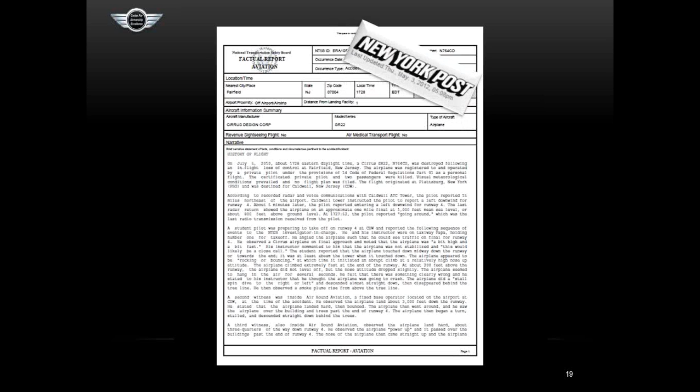Now, all of the information here in this presentation comes from the NTSB factual report on the accident and some background information out of the New York Post.

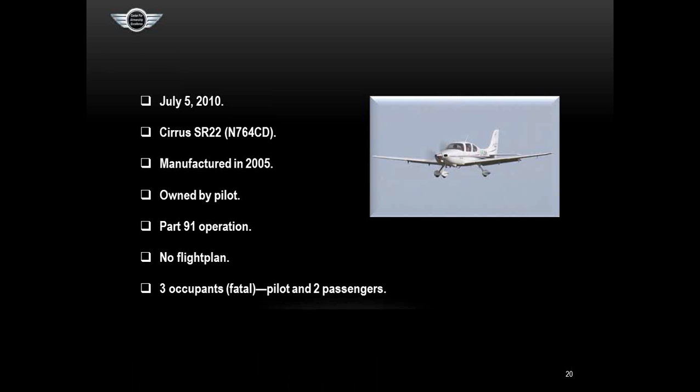The accident took place on July 5th, 2010, so a couple years ago now. It was a Cirrus SR-22, manufactured in 2005, so 5 years old at the time. Owned by the pilot, Part 91 operation, no flight plan filed. There were 3 occupants of the aircraft, and they were all killed—the pilot and 2 passengers. The 2 passengers were family members of the pilot; I believe it was a stepson and his wife, as I recall.

The crash took place at Essex County Airport in Fairfield, New Jersey, and here you can see that located on the northwestern edge of the New York-New Jersey megapolis.

The accident pilot was Dr. Margaret D. Smith. She was 70 at the time of the accident. She held a private pilot certificate with airplane single and multi-engine land, and she had an instrument rating. Total flight time was 885 hours. Total Cirrus SR-22 time was 287 hours, so quite a bit of time in type.

I'd like to point out here, because I won't remember it later, Kern points out in Redefining Airmanship that the Air Force did a study: if you have less than 400 hours in type, you are at much higher risk for error in the airplane than if you have more than 400 hours in type. So even though 287 hours in type is really a lot for us personal flyers to have in one type of airplane, it's not really up to the level where the study, and common knowledge, indicates you're fully comfortable in that airplane—really know it well, have all your procedures down. So it looks like a lot of time, but not really.

She held a third-class medical that was issued the year before with waivers and limitations—we don't know what they were. She had an instrument proficiency check on June 27th of the prior year. So on paper, she was pretty current and pretty experienced.

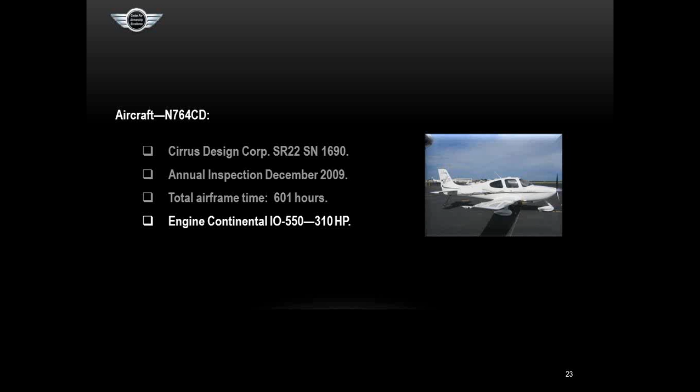The airplane, again, a Cirrus Design Corp SR-22, serial number 1690, so not real early in the run—a mature airframe. Annual inspection was completed the year before. Total airframe time was only 601 hours. And the Continental engine was an IO-550, 310 horsepower, so a lot of oomph to get that airplane going when you needed it.

The accident flight actually departed Plattsburgh, New York at 1600 on the afternoon of the accident. Here's Plattsburgh, upper Hudson Valley, and there's Essex County down here in the megapolis. You can see the route of flight was pretty much down the Hudson. Again, no information on whether they actually followed the Hudson or just did GPS direct, but that was the basic route of flight, the direct route.

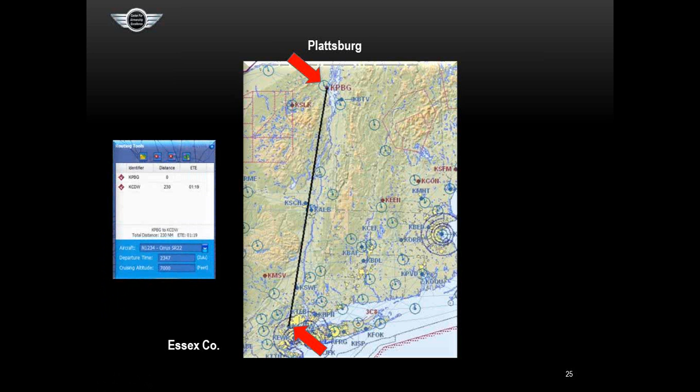AOPA Flight Planner, no wind, says that takes an hour and 19 minutes. As you can see, the flight departed Plattsburgh at 1600 and the crash took place down at Essex County at 1728. So it pretty much looks like they came pretty much straight down, direct, and then maneuvered for the landing.

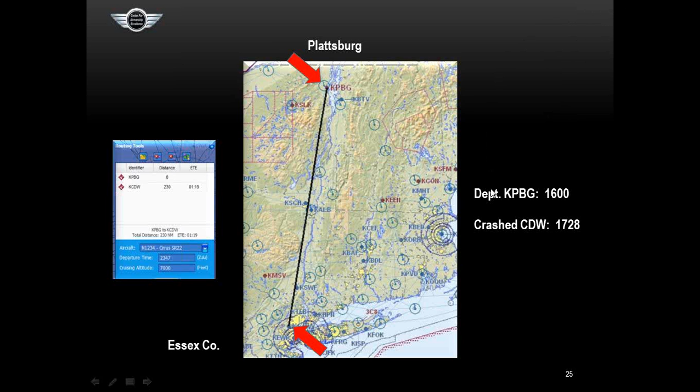Essex County Airport, where the accident took place, one of the links in the chain took place on runway 4. The air crash itself didn't take place on runway 4, but that's the runway we're going to talk about.

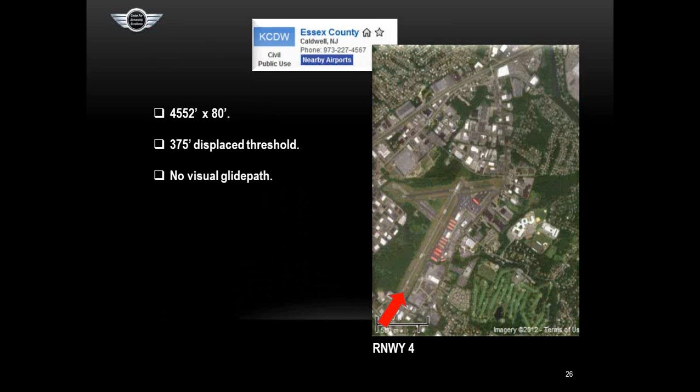It's 4,552 feet by 80 feet, with a 375-foot displaced threshold, so still over 4,000 feet, plenty of space at sea level for a Cirrus. No visual glide path on that runway, so no VASI or PAPI, and no electronic glide path. There was a GPS approach to the runway.

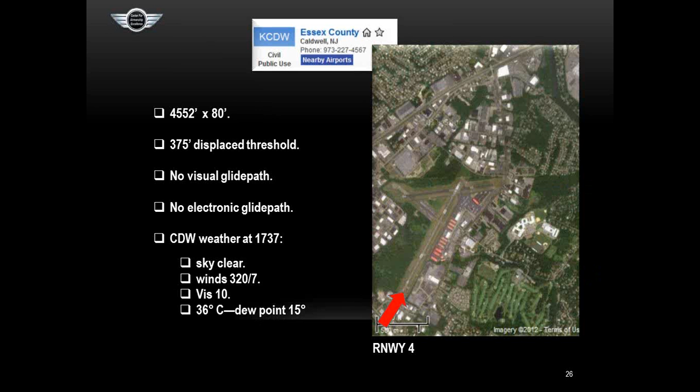The weather at Essex County at the time of the accident: sky was clear, winds 320 at 7, so a light left crosswind, but shouldn't have been anything too difficult to handle. Visibility was 10 miles, temperature 36 Celsius, dew point 15, altimeter 2994, so good air, it looks like, at the time of the crash.

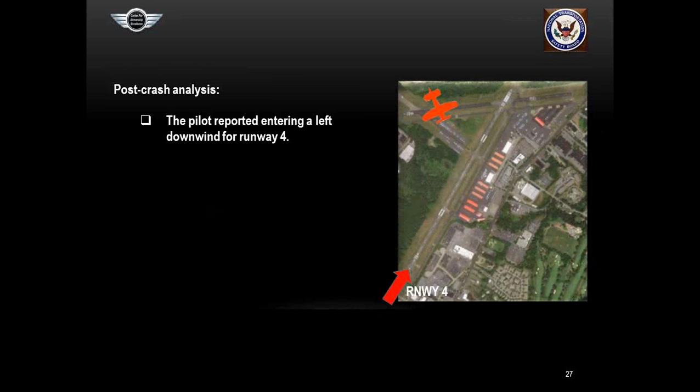The pilot reported entering a left downwind for runway 4. That was on the tower tape, so everything was going smoothly. The last radar return showed the airplane at an approximate 1 mile final, at about 800 feet above ground level.

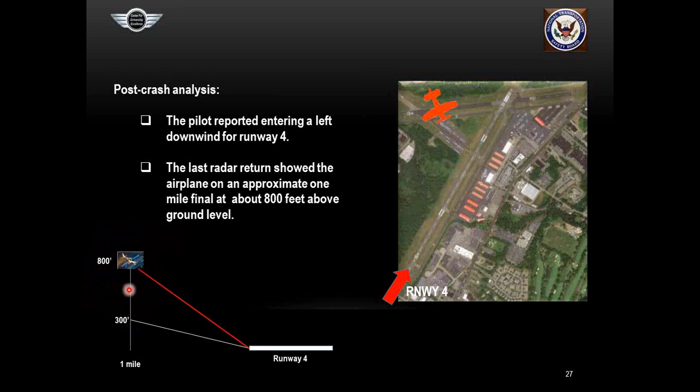Here's a quick diagram to get the perspective. At 1 mile out on a 3-degree glide slope, you should be right around 300 feet AGL. However, on this flight they're at 800 feet AGL, so 2.5 times or thereabouts higher than they should have been. So, a very steep approach.

Now, there were some witnesses. One was a student pilot doing his run-up with an instructor in the airplane at the approach end of runway 4, preparing for takeoff on that runway. He had a good view of the approach and landing.

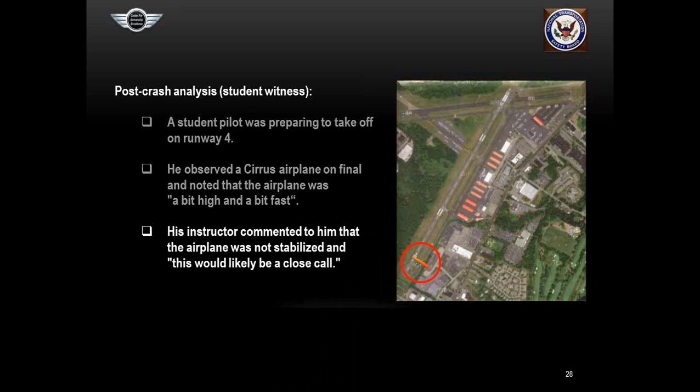He observed a Cirrus airplane on final and noted that the airplane was a bit high and a bit fast, that's a quote. His instructor commented that the airplane was not stabilized, and this would likely be a close call.

The student reported that the airplane touched down midway down the runway, or maybe towards the end — at least it was abeam the tower when it touched down. If that truly was abeam the tower, she landed almost all the way down the runway. We'll hear other witnesses give a slightly different report, so keep that in mind — eyewitnesses generally never get it exactly right.

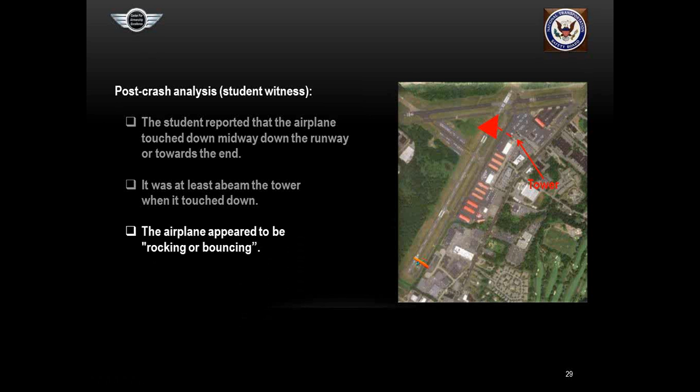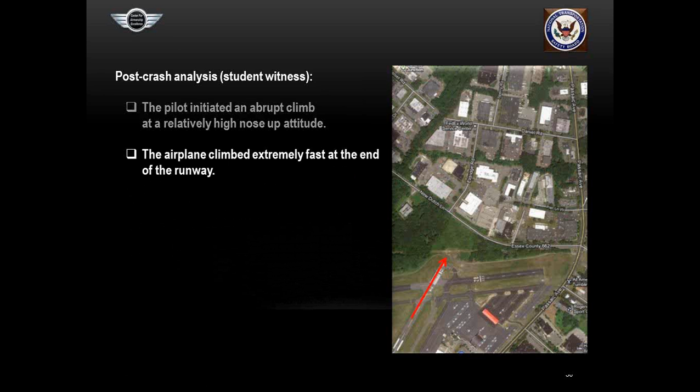The airplane appeared to be rocking or bouncing, according to the student pilot witness down at the end of runway 4. He continues that the pilot initiated an abrupt climb at a relatively high nose-up attitude. The airplane climbed extremely fast at the end of the runway. At about 200 feet above the runway, the airplane did not level off, but the nose attitude dropped slightly. The airplane seemed to hang in the air for several seconds.

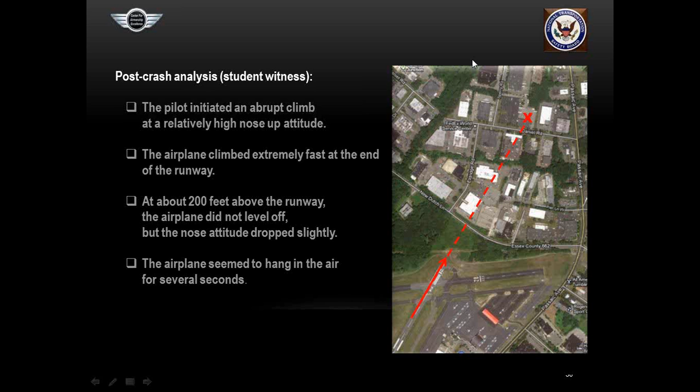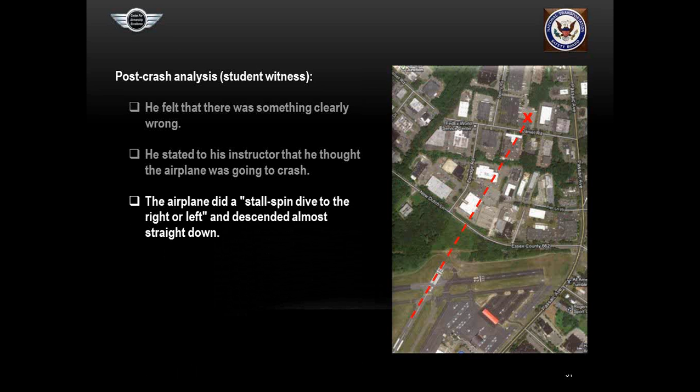Still with the student pilot witness: he felt that there was clearly something wrong, and stated to his instructor that he thought the airplane was going to crash. The airplane did a stall spin dive to the right or left, that's a quote, and descended almost straight down, then disappeared behind the tree line. He then observed a smoke plume rise from above the tree line.

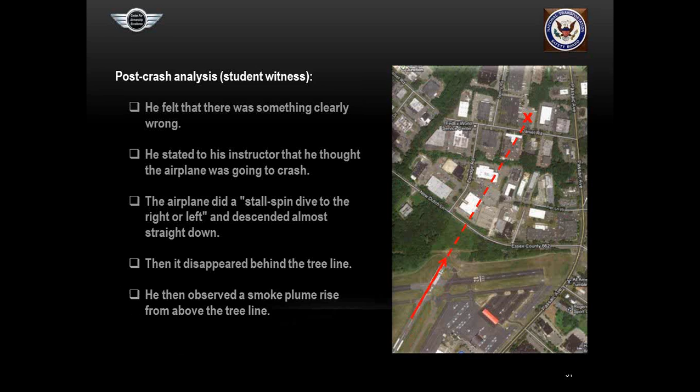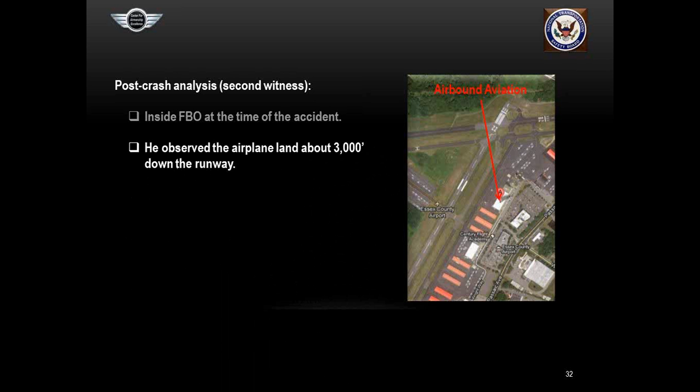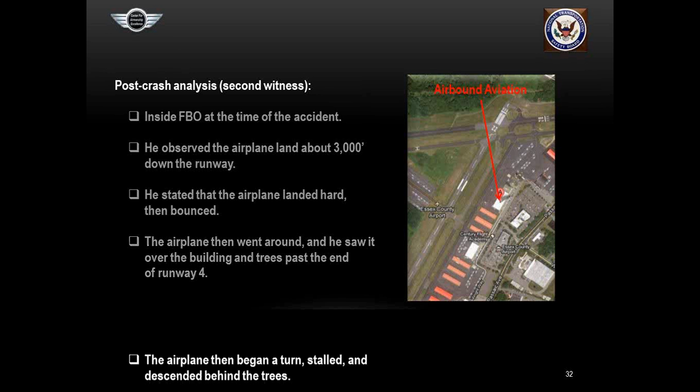A second witness, located at Airbound Aviation, about two-thirds of the way down the runway, was inside the FBO at the time. He observed the airplane land about 3,000 feet down the runway, he thought, and stated that the airplane landed hard, then bounced. The airplane then went around, and he saw it over the building and trees past the end of runway 4. The airplane then began a turn, stalled, and descended behind the trees.

A third witness, also at Airbound Aviation, observed the airplane land hard about three-quarters of the way down runway 4. He observed the airplane power up and pass over the buildings past the end of runway 4. The nose of the airplane then came straight up, the airplane started a turn to the left, and then descended straight down until it crashed.

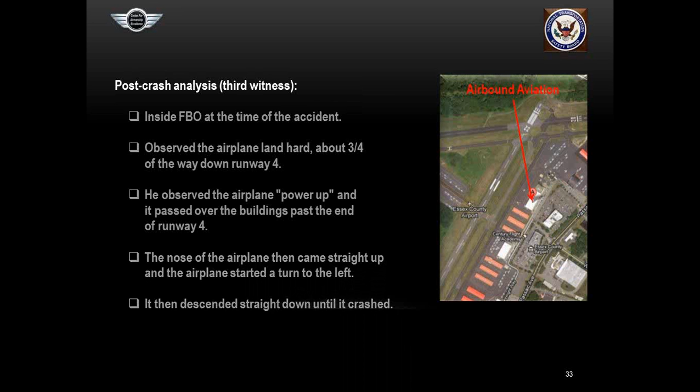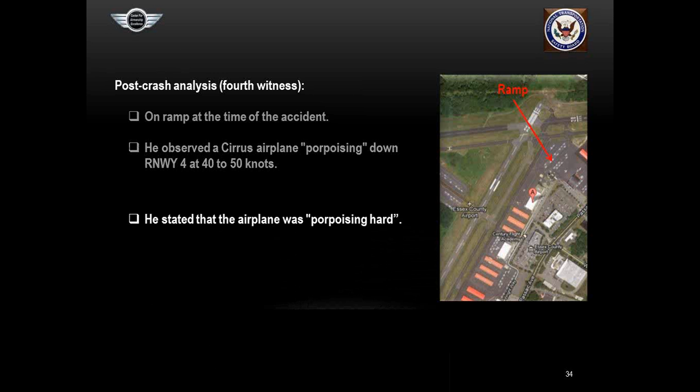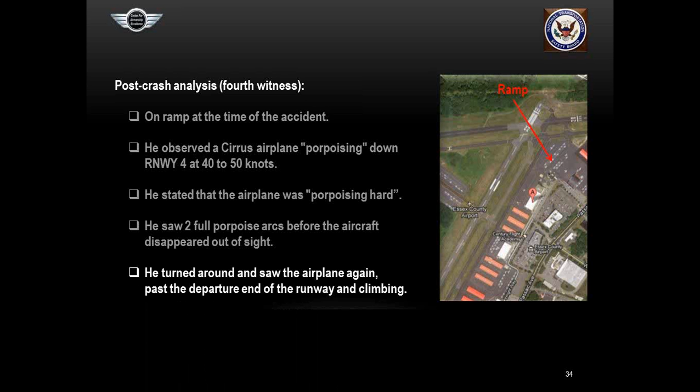One more witness, a fourth witness on the ramp, observed a Cirrus airplane porpoising down runway 4 at 40 to 50 knots. He stated that the airplane was porpoising hard, and he saw two full porpoise arcs before the aircraft disappeared out of sight. He turned around and saw the airplane again past the departure end of the runway, climbing.

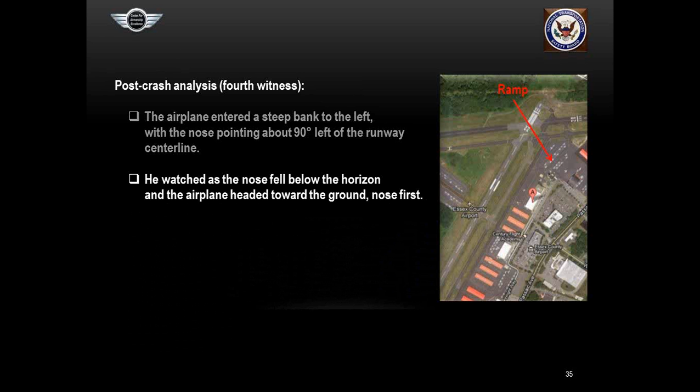Still the fourth witness: the airplane entered a steep bank to the left with the nose pointing about 90 degrees left of the runway centerline. He watched as the nose fell below the horizon and the airplane headed straight toward the ground, nose first. He saw the airplane disappear below the horizon, then observed a fireball and black smoke coming from the accident site.

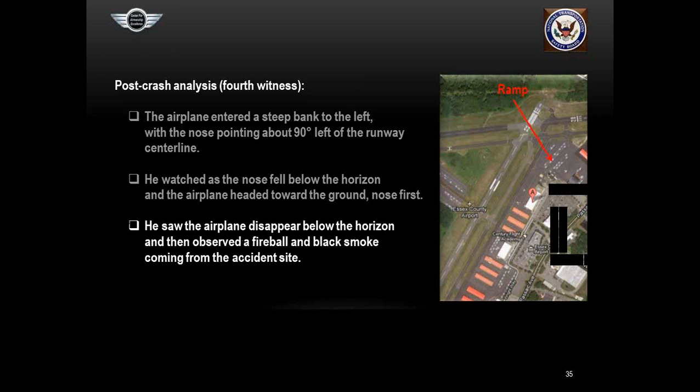So all 4 witnesses, their stories are pretty well corroborated. They didn't see the exact thing, but they saw what I'm sure we'd all agree was a stall spin, loss of control in flight situation.

Now here's the post-crash analysis. Portions of the accident sequence were recorded by 4 building-mounted security cameras. I searched YouTube and the internet for these clips, and nobody's got them up, or at least I couldn't find them. Those would have been very interesting, I'm sure.

But at any rate, the 4 cameras caught it, and the NTSB looked at them. The examined videos revealed an in-flight loss of control, a steep bank and vertical descent, and an impact with terrain at near vertical nose-low attitude.

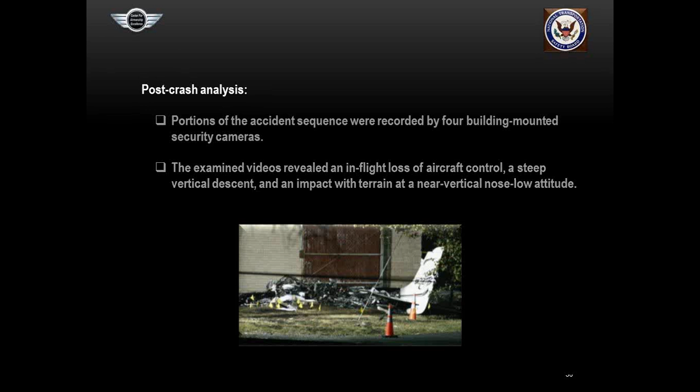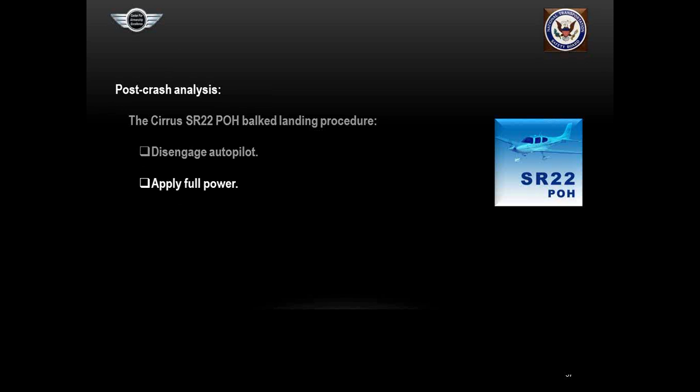The Cirrus SR-22 Pilot's Operating Handbook balked landing procedure states: disengage the autopilot, apply full power, then reduce the flap setting to 50%. If obstacles must be cleared during the go-around, climb at 75 to 80 knots with 50% flaps. After clearing any obstacles, retract the flaps and accelerate to the normal flaps-up climb speed.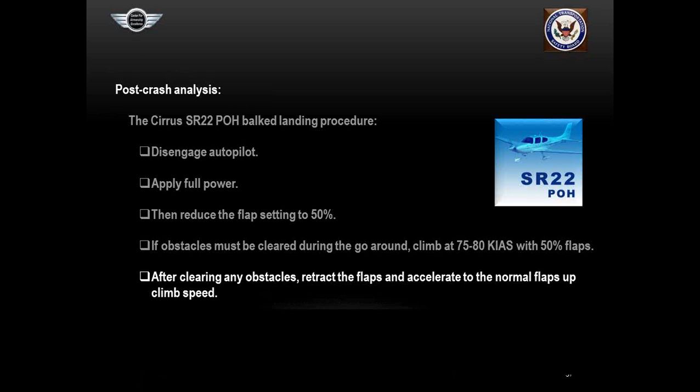The wreckage was found adjacent to a business located in Fairfield, New Jersey, which is just a little north of the airport there, about a half a mile north.

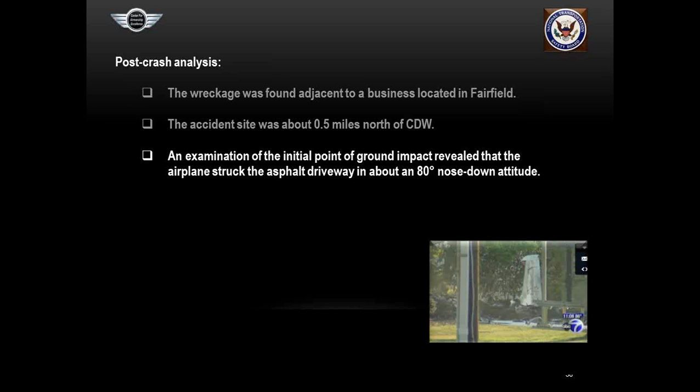An examination of the initial point of ground impact revealed that the airplane struck the asphalt driveway in about an 80 degree nose-down attitude. All flight control surfaces, engine, propeller, and CAPS components were located at the accident site. CAPS is the Cirrus Airframe Parachute System.

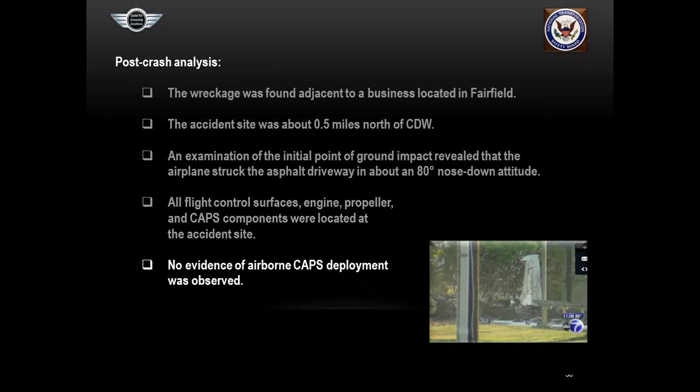No evidence of airborne CAPS deployment was observed. Control continuity was confirmed from the ailerons, rudder, and elevator to the cockpit controls.

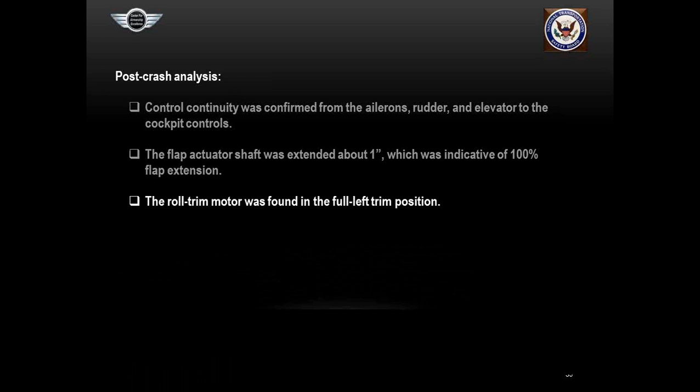The flap actuator shaft was extended about 1 inch, which was indicative of 100% flap extension. The roll trim motor was found in the full left trim position. The pitch trim motor was found in the full nose-down trim position.

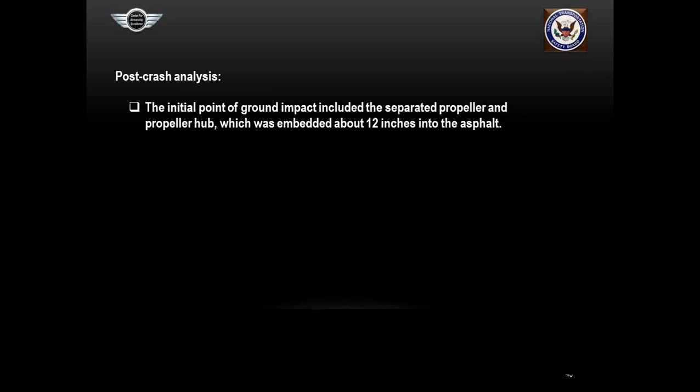The initial point of ground impact included the separated propeller and propeller hub, which was embedded about 12 inches into the asphalt. The propeller exhibited 45-degree shear lips.

Now, this isn't the picture of the Cirrus, obviously. This is a Cessna 400 series airplane, but this is a good picture of what it looks like when the propeller blades contact the runway while the engine is still turning those blades. They're bent back like that, usually at a really good angle.

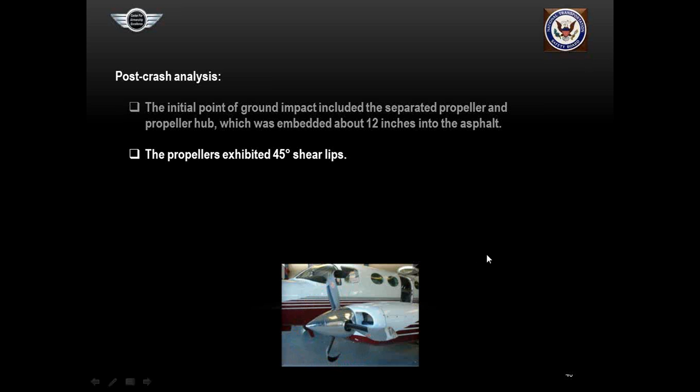All 3 propeller blades exhibited rotational scoring, blade twisting, and bending, curling near the blade tips. All 3 blades were missing material from their tips.

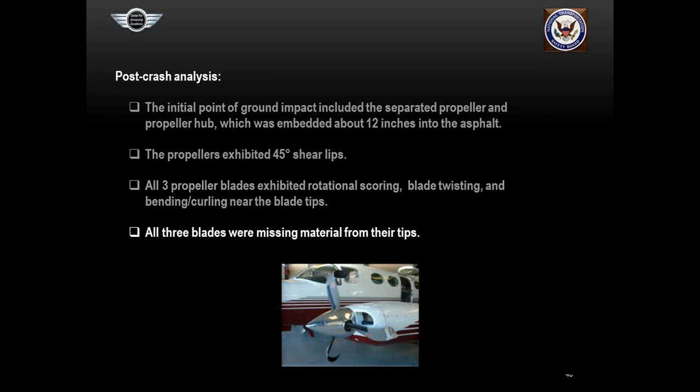An examination of runway 4 revealed 2 sets of strike marks indicative of propeller contact with the runway. A set of 6 marks was located at about 2,300 feet from the approach end of runway 4, and another set located at 2,512 feet, so about 212 feet further down. So you could just visualize a porpoise or a bounce going a couple hundred feet easily.

Several fiberglass pieces identified as fragments of a nose wheel pant were scattered around the area at the intersection of Taxiway Bravo and Runway 4. Runway 4 again is 4,553 feet in length.

So you can see that, again, those eyewitness reports about where she first touched down and bouncing and so forth are pretty well corroborated here with the evidence that the NTSB discovered in the post-crash analysis.

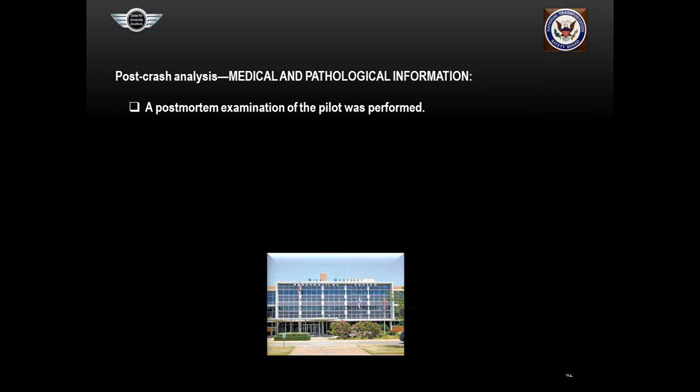Now, as the FAA usually does, they sent a blood sample out to CAMI in Oklahoma City, and a post-mortem examination of the pilot was performed. The autopsy report noted the cause of death as blunt impact injuries.

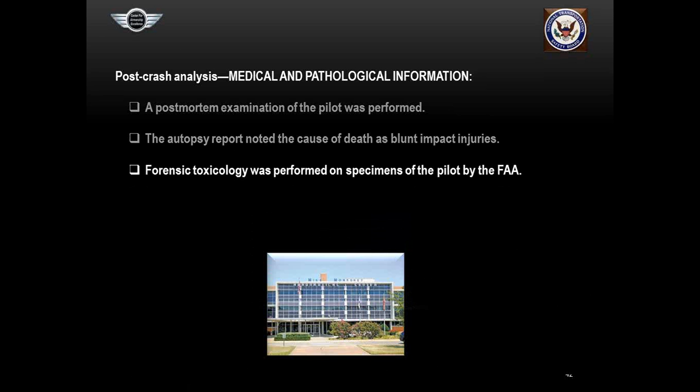Forensic toxicology was performed on specimens of the pilot by the FAA. The CAMI toxicology report was negative for ethanol, so apparently she wasn't drinking, cyanide, carbon monoxide, and drugs.

NTSB probable cause: the pilot's failure to maintain aircraft control during the go-around following a hard landing. Contributing to the accident was the pilot's continuance of an unstabilized final approach and the improper use of flaps during the go-around.

All right, well, we've got all the facts there. This is a little thin on background and detail and all of that, so we got through it fairly quickly this evening. But I want to take a little different approach to how we start to identify these links in the error chain. If you've attended these before, you recall that I usually have a series of poll questions, and that works pretty good.

But I thought I'd try something different this evening, see if we can get a little more discussion going. So let's work on identifying these links by having a little whiteboard discussion. I'm going to use a Word document to do that, so I have to exit that PowerPoint, and there we go.

So we're going to use this as our whiteboard. Let's start making our list, building our list here of links in the error chain. If you have identified at least one link in the error chain, please raise your hand now, and I'll open up your mic, and you can share it with us. And I've got my list, and there's more than one link that I identified.

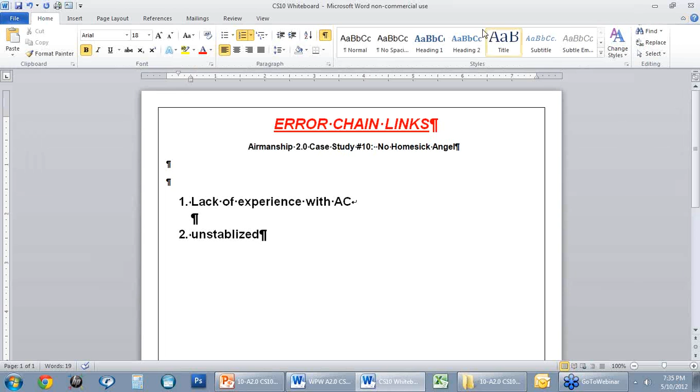How about Steve Acerbi? Steve, I've got your mic open. Go ahead. Steve, we don't have much.

Vertical guidance. There we go. Lack of vertical guidance. Is that what you said, Steve? Yes, sir. I agree. Lack of vertical guidance.

You know, I always like to have vertical guidance on every runway, no matter what kind of airplane, if I can get it, because it's just one more clue, one more piece that you can use to have a good stabilized approach. And I'm a firm believer in stabilized approaches.

I don't think they're really taught in our personal flying end of the game by most instructors. I know a lot. I'm still doing some instructing, and I fly with pilots, personal flyers a lot. And, you know, I notice a lot of them have not bought into the stabilized approach.

There are a lot of theories and a lot of thinking about why non-stabilized approaches are better for little airplanes, but I'm not a believer in that. I think stabilized approach is critical.

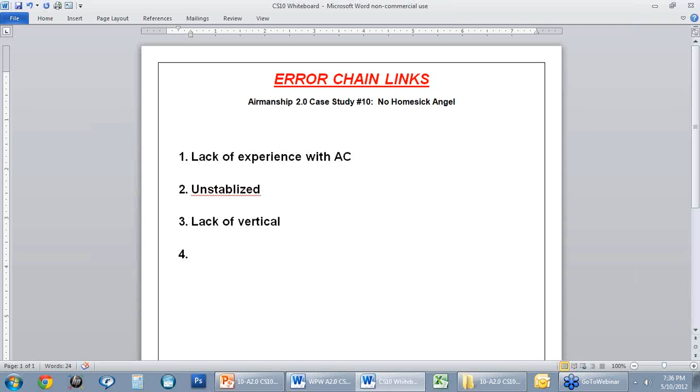Okay, Tom Vogt. Tom, mic's open. Yeah, actually, I was. My thought was the traffic pattern. I mean, even though it is controlled airspace, it just seemed like there wasn't proper preparation for landing.

The aircraft was ahead of the pilot. Exactly. So there are actually two of them there. You're right. The traffic pattern, because she obviously was not following her normal pattern procedures, because she ended up 800 feet high at a mile out, which was way too high.

And then also the behind-the-airplane feeling she seemed to have. And I think you're right. That's also kind of evidenced in that go-around too. So usually that indicates lack of proficiency. So we'll put that down.

All right, great, good, Tom. Whoops, I got that one right. Excuse me, I'm kind of anally retentive on those kinds of things. All right, Tom, we closed you off your mic.

Anybody else like to come up with a link in the error chain that they observed? I've got a couple others here. Okay, Matthew Coombs. Matthew, go ahead.

I noticed you said she had pitch trimmed full down, and also fully to the left. Yes, just misuse of flight controls, and the flaps were completely down, so she didn't reconfigure after the go-around. Exactly, you're right. We could put that under misuse of flight controls or not knowing procedures.

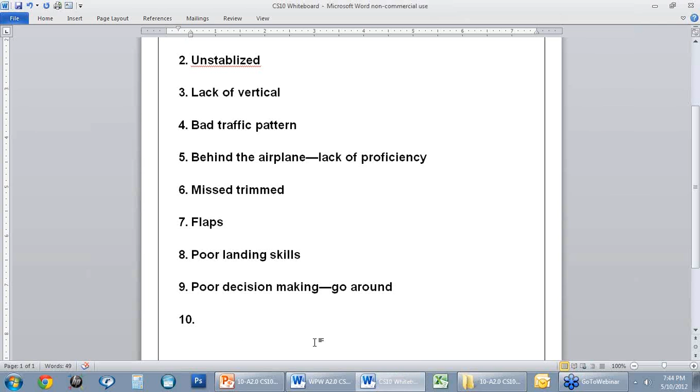Yeah, I'd like to go back a little bit before she started the flight. What kind of day did she have? Because this flight occurred at the end of the day. Was she stressed or tired or something like that? Did that have any impact on the flight? Good question. There was no information in the data on that, and I wondered about that too, because they apparently were on vacation up there in upstate New York, and so who knows?

It might have been she had to get rushed back. She was a pretty prominent doctor. Did a lot of social things, a lot of charity work. So maybe she had to get back for something. So a good question. External pressures. That might have been why she rushed that approach or didn't want to abandon it. She had to get on the ground, right? Good comment, David.